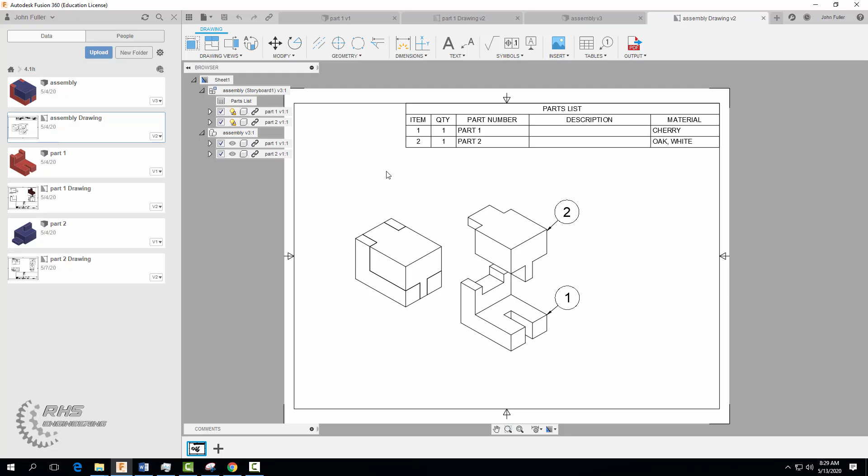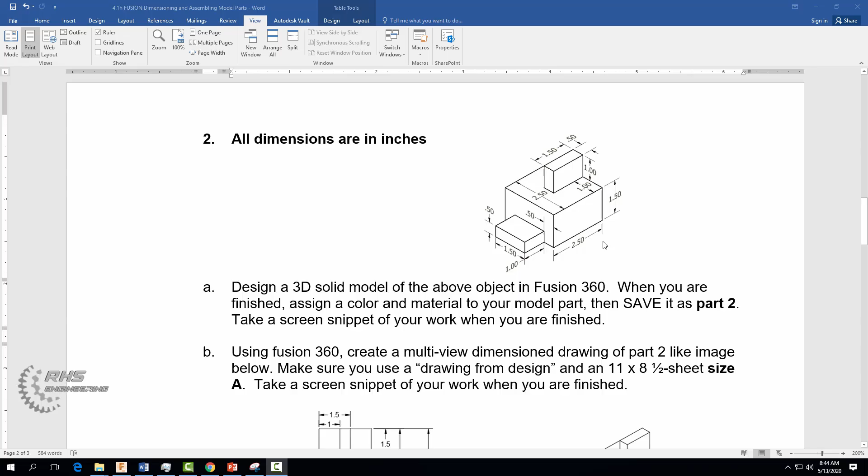So quickly going through our assignment here, we're first going to design this part or object seen here using inches. Then we're going to create a dimension sheet, size A, to dimension the part using a multi-view drawing. Then we're going to design this other part, once again in inches, and dimension it using a sheet size A to create a multi-view drawing of the part.

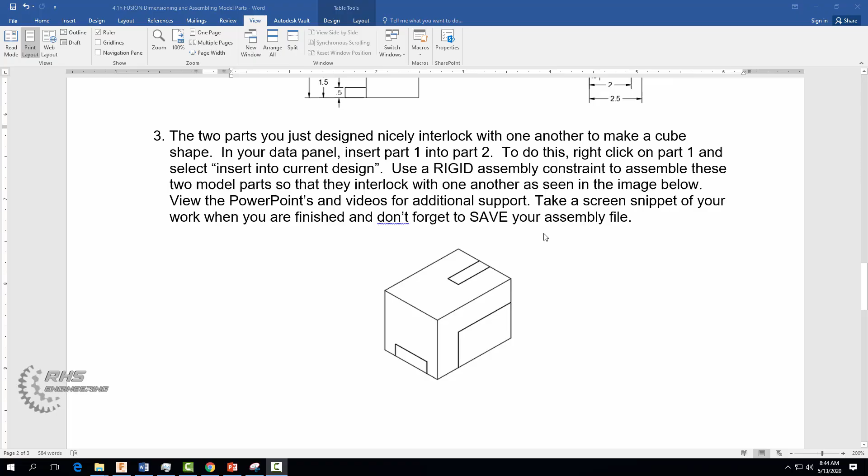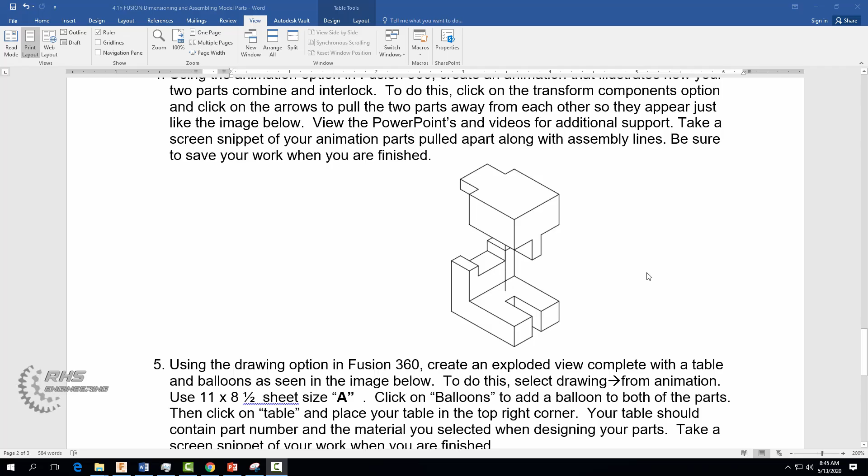Then we're going to assemble these two parts because they kind of interlock and fit together nicely. Then we're going to animate these two parts and pull them apart to show how they come together. Finally, we are going to create an exploded view of these two parts along with a parts list table. So whenever you're ready, go ahead and open up Fusion 360.

So let's come on over to Fusion 360, and the first thing you want to do is start a new project. I'm going to call this Activity 4.1H, hit Enter, and then double click on this project here.

Since I have a tab open, I can go ahead now and start creating my first part. So I'm going to come on over here, create a sketch, and we're going to start on the XY plane. I'm going to go ahead now and close my data panel just to make the part a little bit larger for you guys to see.

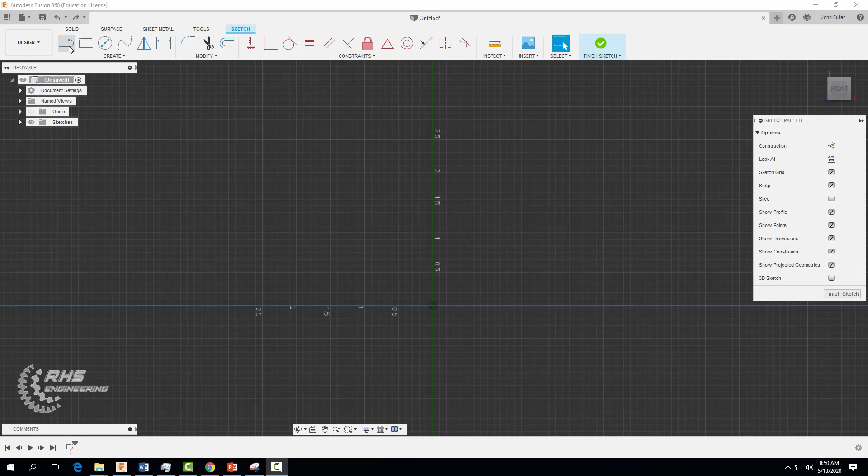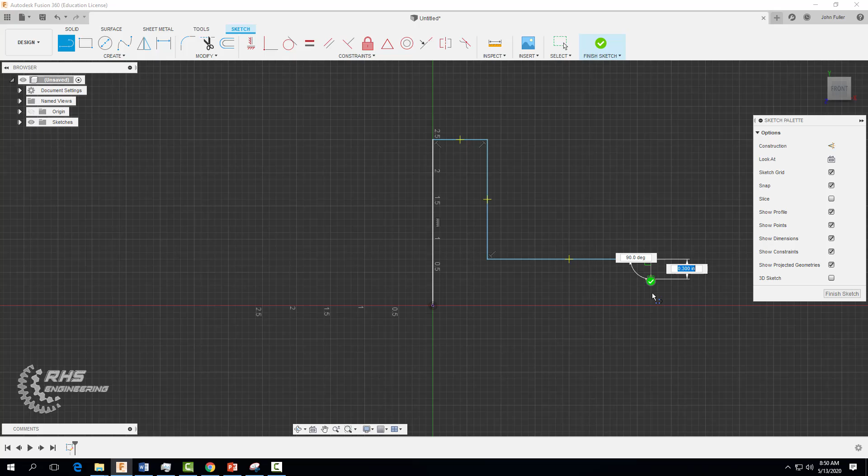Let's go ahead now and start drawing out our first 2D sketch. Come up to your line tool, click on it. Starting at our origin, we're going to come on up a distance of 2.5 inches or so, come across. I'm going to just kind of draw out a rough sketch and we'll dimension it later, so roughly 1 inch or so. I'm going to come down about 1.5 inches, across about 2.5 inches, and then down about 1 and back to our origin.

Now I'm going to go to my dimension tool, make sure that guy's 2.5. Let's make this 1. We're going to make this distance here 1.5, and this distance here 2.5, and this distance here 1. We don't need it because now our sketch is fully constrained. Okay, now we can go ahead and finish our sketch.

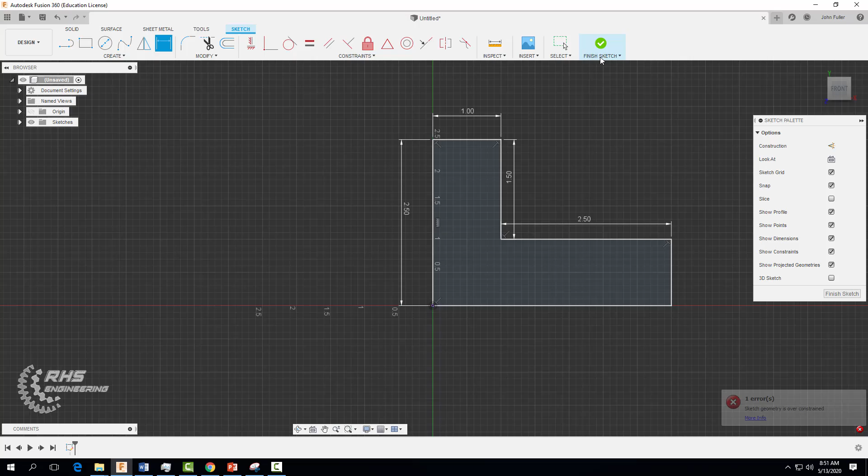Let's go ahead now and extrude it out a distance of, we're going to type in 2.5, and go ahead and hit OK. I'm going to set this view now as my home.

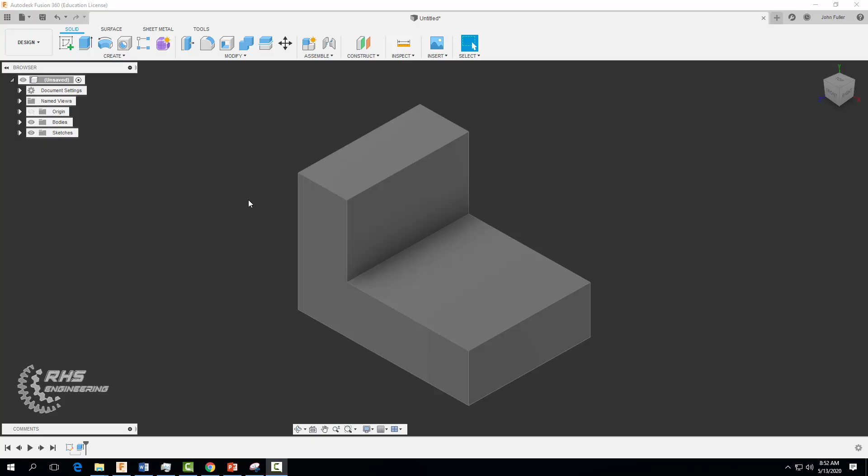Now let's come on up and start a sketch here on this face. Go ahead and click on it. I'm going to grab my 2-point rectangle. I'm going to start on this line here, right around in this area, and I'm just going to draw out a rectangle, something like that. And now we're going to dimension it to the appropriate dimensions.

So let's come on over here and click on your sketch dimension tool. From each side, we want that to be a distance of 1. Same thing on this side. And then we want this distance to be 1.5. Enter. Okay, now let's go ahead and finish our sketch.

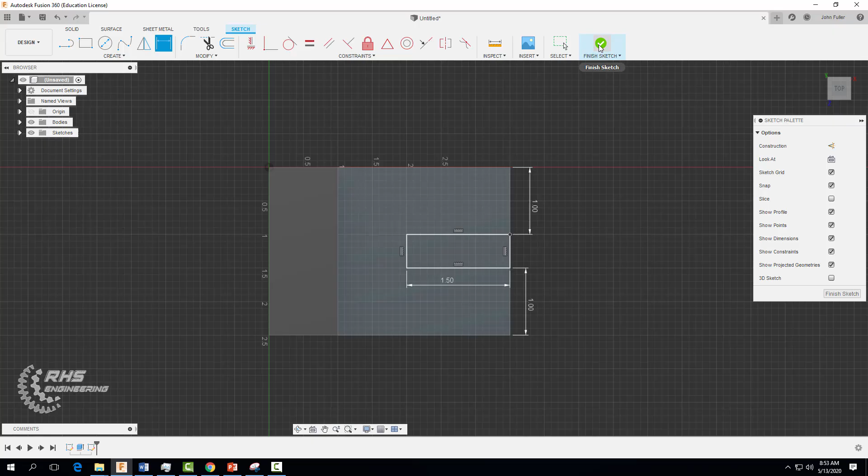We're going to extrude it. We're not going to add, we're going to go the other way, a minus 1. Make sure it says cut, hit OK.

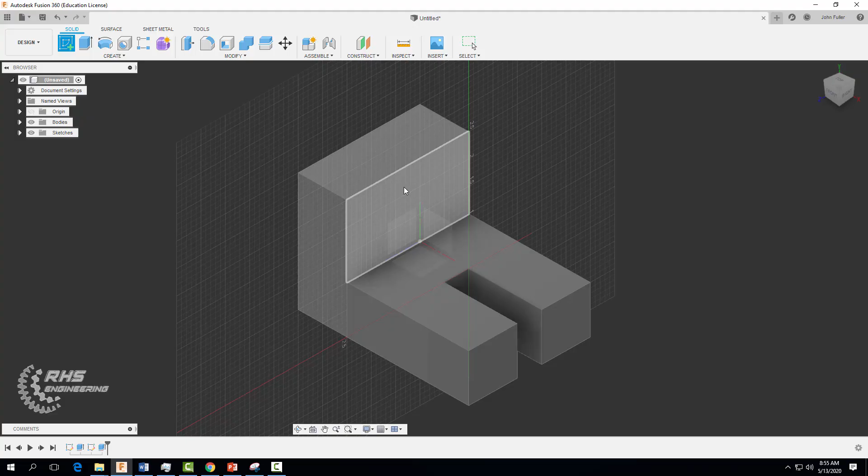Now let's create this last feature here on this face. So let's start a sketch here on this face. And once again, we're going to grab out our 2-point rectangle, find the top line here, and right in this area, I'm going to click and draw out a rectangle and click again. And I'm going to grab my sketch dimension tool.

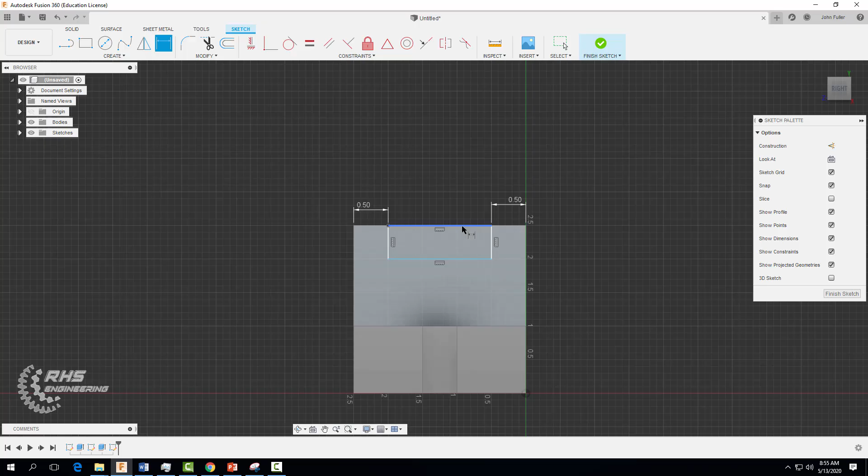And from this side, we want it to be 0.5. Same thing on this side, 0.5. And then this distance also 0.5. All right, and we're done. Let's finish our sketch. We're going to extrude that guy the other way, a distance of -1. Hit OK.

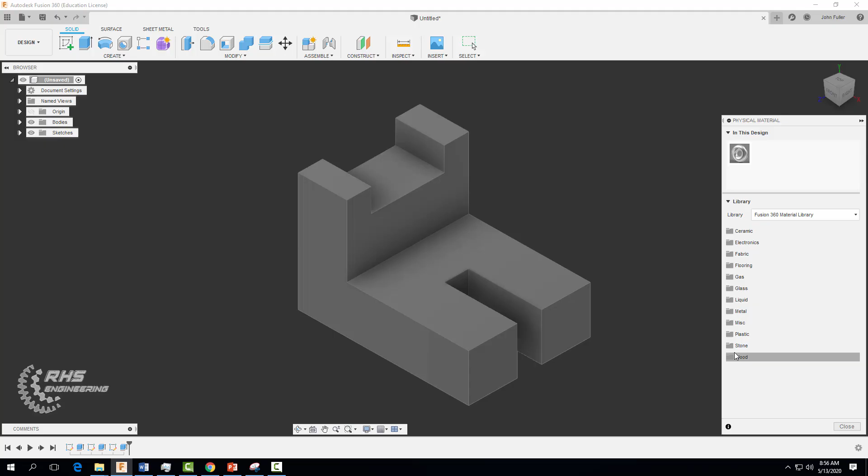Now let's go ahead and assign a material for this object or part. We're going to come on over to Modify and go to Physical Material. And I'll let you decide on a material you would like to use. I'm just going to go ahead and pick some wood here. Let's just use cherry.

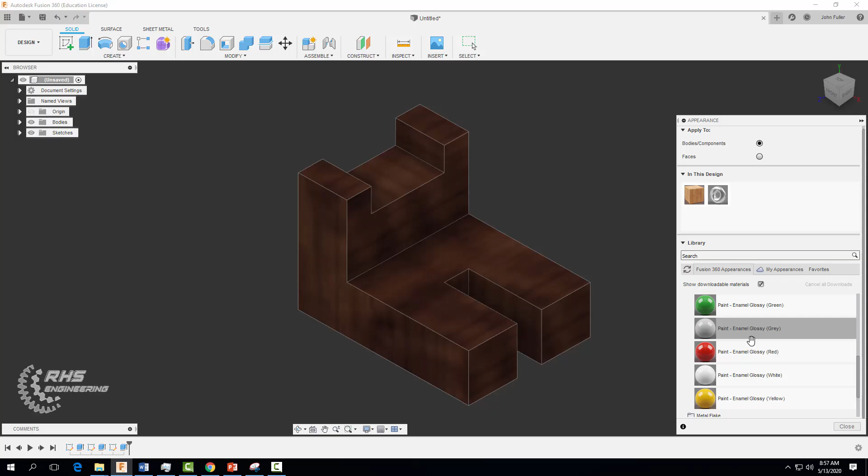Now let's say you want this to be wood, but you also want to add a color to this. To do this, you come on up to Modify again and do Appearance. What you need to do now is come on over here to Paint. Click on Paint, and you can do something glossy, metallic-y, whatever you want. I'm just going to do a glossy sort of red for this part. So it's got a material and we painted it red, essentially. All right, go ahead and close.

And when you're done, just go ahead now and we're going to save this as part 1 in our activity 4.1H location and hit save.

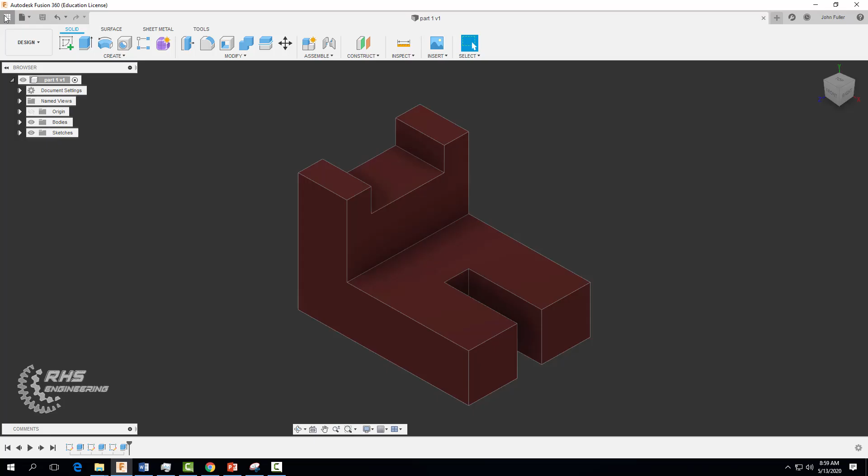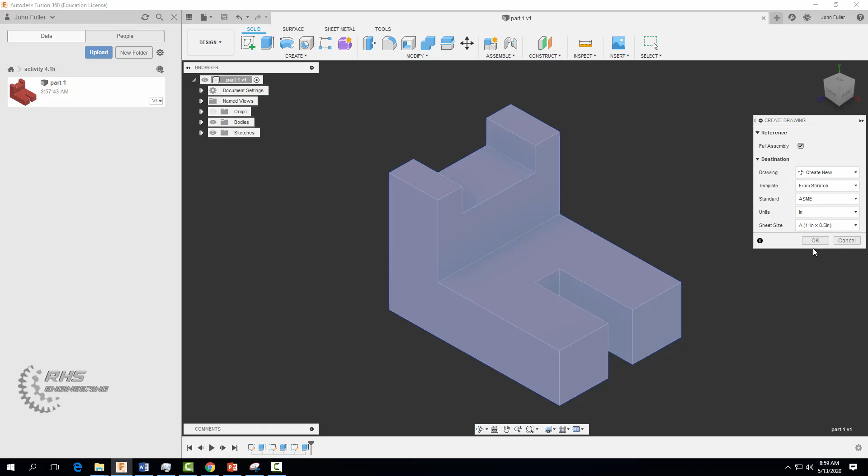All right, so now let's go ahead and make a dimensioned drawing file of our object or part seen here. So to do that, let's just go ahead and show our data panel here. And under design here, because we're in design mode, we're going to now do what's called a drawing, a drawing from design and from this design. So go ahead and click on that. And we want a sheet size, we want to select 11 inches by 8.5 inches, and then hit OK.

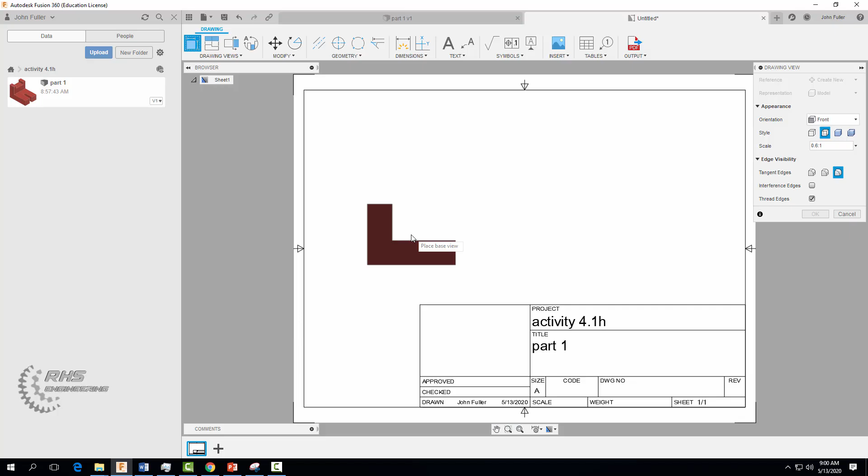And now it's asking you, right when it opens up, hey, this is our front view, where do you want it? And this is our scale, 1/2 essentially. Well, I'm going to change this to make it a little bit bigger. I'm going to make it 0.6 to 1, so it's a little bit bigger. Notice how it's got a little bit bigger now, because I want to use up all of my space.

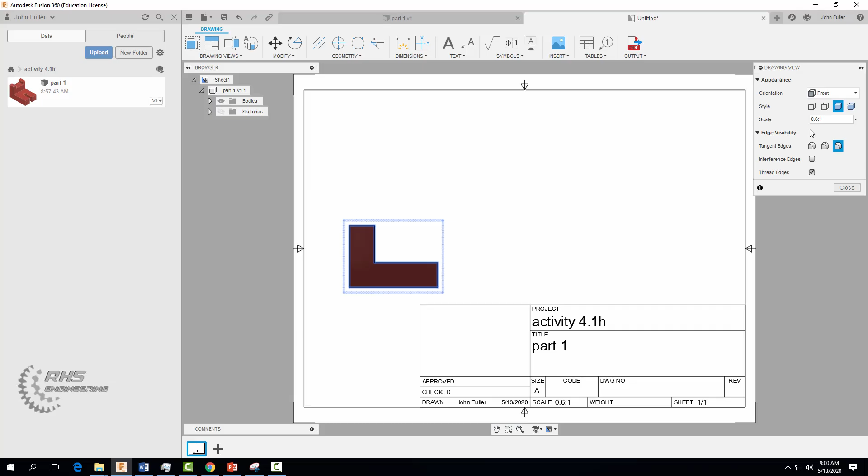So I'm going to click here, and also a couple options: if you want to leave it color like you see here, click right here, click shaded. Let's just go ahead and do that. Let's hit OK. But let's say you don't want to make it shaded, so we're going to edit this view and click on it again, and we can just do a basic outline of it. Let's keep our scale the same and go ahead now and hit close.

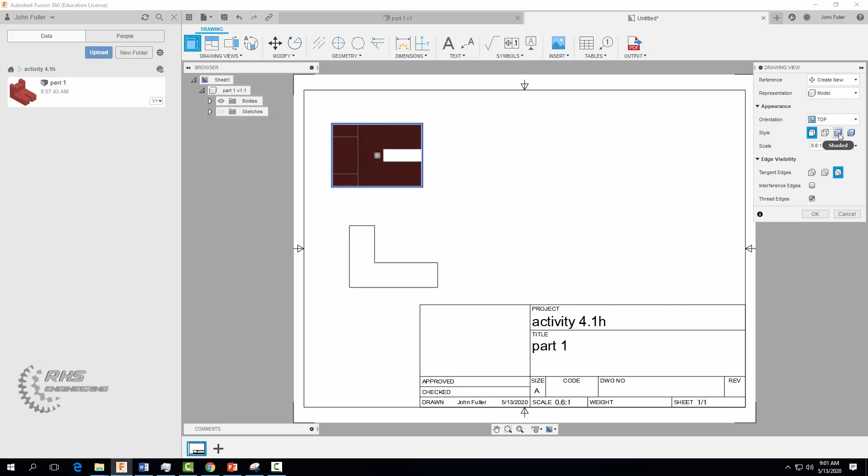Now let's bring in our top view. So right up here under base view, I'm going to click here and change this to top view. I'm going to change my scale again to 0.6 to 1, so it's a little bit bigger than 0.5 to 1 or half. And I'm going to change this to visible edges. Like I said, you can make it color if you want and just click on that shaded button right there. Go ahead now and hit OK.

I'm going to bring in my side view now. I'm going to come over here. My right side view would be right here. I'm going to change the scale again, 0.6 to 1, and let's make those visible edges outlines. I'm just going to click right over here and then hit OK.

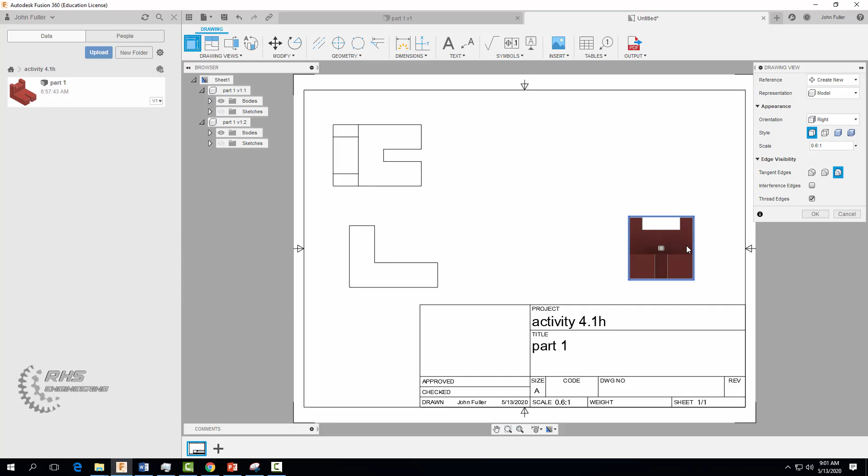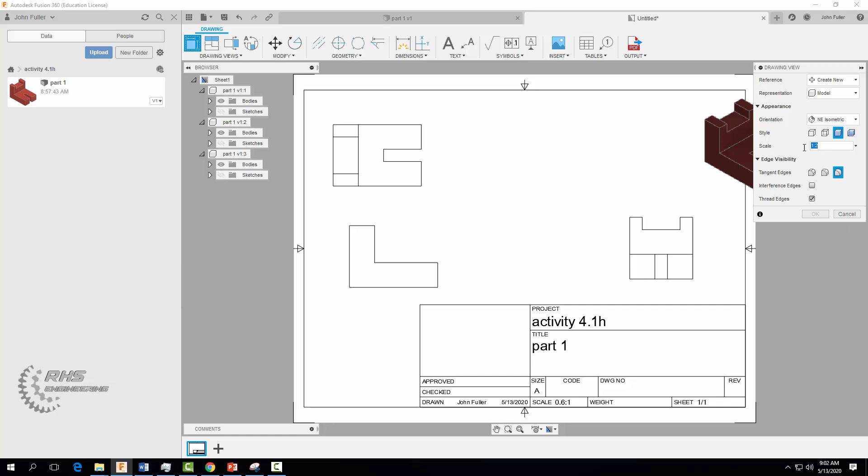And then finally, let's bring in our 3D view. Remember, every multi-view drawing should have a front, top, and side view and a 3D view. So let's do a base view, and in this case, we're just going to come on down here and check out, let's use the northeast isometric. That looks good. And I'm actually going to leave this one color, okay, shaded. Let's keep this consistent with the size, 0.6 to 1. And I'm going to click where I want it and then hit OK.

And actually, you know what, let's move it down. So you come on over here, if you want to move it, you click move. And then you click right here and you just kind of move it, and then hit OK.

Remember, these drawing files are extremely important. This is what the company will send off to the manufacturer so they have the necessary information in order to make the part. Okay, so let's go ahead now and start adding dimensions.

Come on up here, click on the dimension button, and on my front view, I'm just going to click on this side, click on this side, and drag my mouse up and click again. I'm going to add one more, click here, click down here, drag my mouse up and over, and then click where I want it.

And now on this view over here, I'm actually going to move it. So I'm going to go to move, and I'm going to kind of just move it a little bit up and out of the way.

That's probably good. Okay, now I'm going to go ahead and start adding dimensions again. Let's get this distance to this distance, this distance to this distance, this distance to this distance.

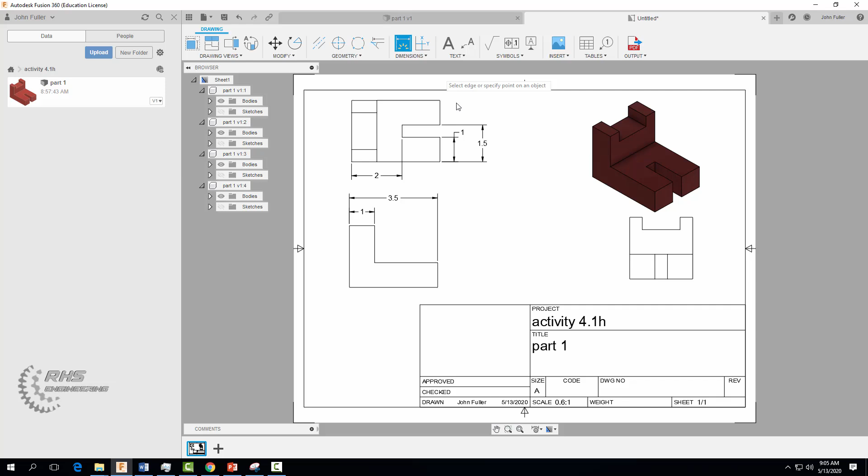All right, now let's come on over to our side view and start dimensioning it. I'm going to hit escape to get out of dimension mode, right click, move, select on it, and move it down right around in here. I think that'll do the trick. Hit OK, come back to dimension.

I'm going to click here and here, and now let's do here to here, the overall height here. And then we're going to do this little distance right here, and then this distance. We'll move some stuff around here in a second to make it look better.

Okay, so I have everything dimensioned now. I'm going to hit escape to take it out of dimension mode, and now I'm going to click on these guys to move them down to make room. I'm basically just going through and tidying up stuff. I don't like this one up here, so I'm going to bring that one down in here. I'm going to move this 1.5 in a little bit. And with that said, I'm going to move this guy a little bit out of the way.

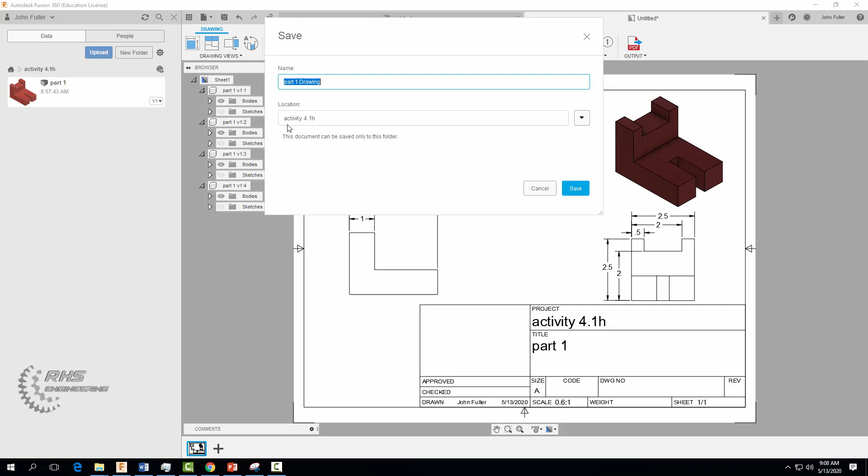And when you're done with your dimension drawing file, we need to save it. Let's go ahead and select save. Part one drawing looks good, it's in our activity 4.1H. Hit save, and it should show up over here. And that's it for part one.

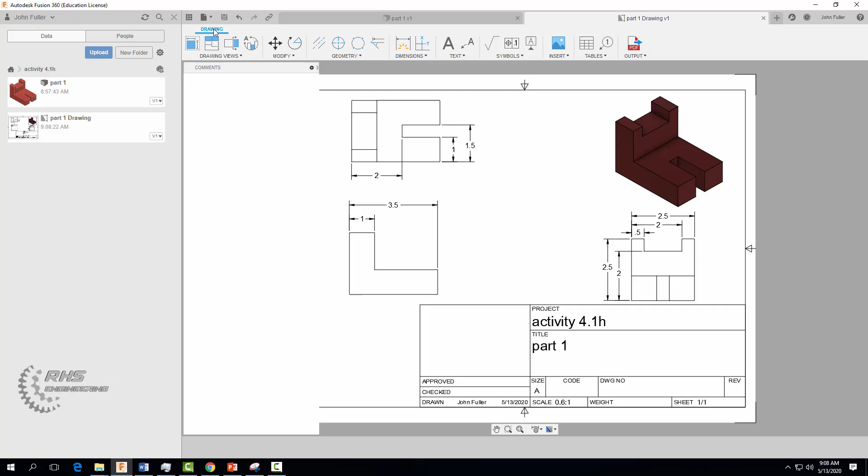Now let's go ahead and start part two. To do that, come on up here. You can also just start a new design. I'm going to click here, new design. For our second part, let's go ahead and create a sketch on our XY plane. I'm going to X out of my data panel.

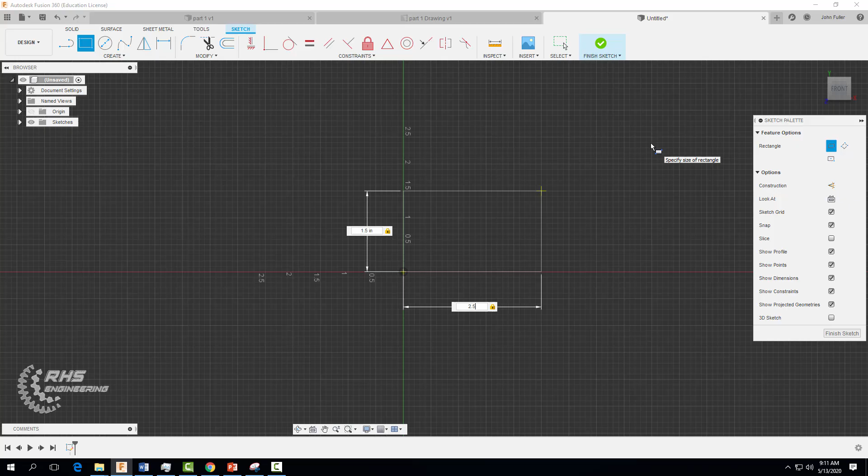I'm going to grab my 2-point rectangle tool and draw out a square. I'm going to type in, while that's highlighted blue, 1.5, tab, 2.5, and then hit enter. Okay, that's it for the sketch. We're going to finish the sketch, and extrude it out a distance of 2.5.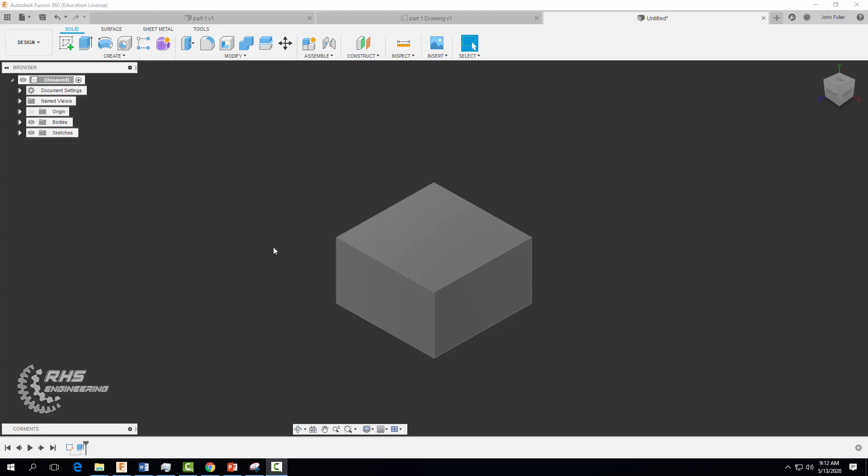I'm going to set my current view as home. Now let's create a sketch on this front face right here, and grab our rectangle tool to draw out a rectangle about yay big here. I'm going to type in 0.5, tab 1.5, hit enter. Then I'm going to dimension it from this edge a distance of 0.5. Let's finish our sketch.

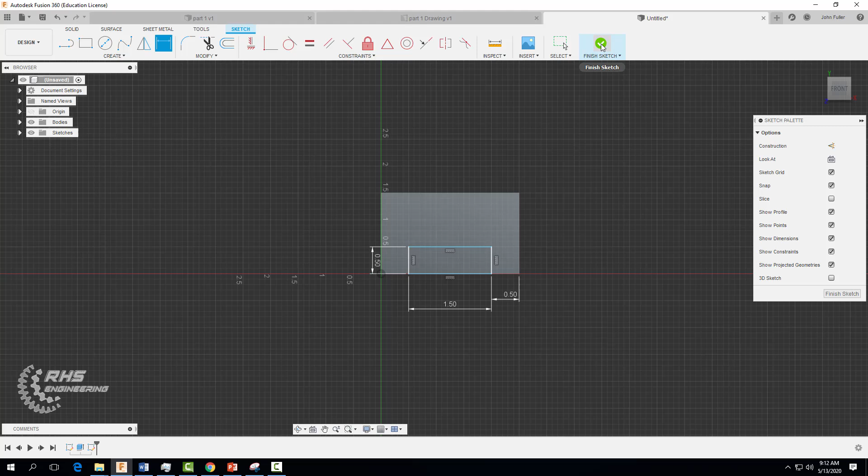We're going to extrude it out a distance of 1 inch. Click on the part or the face you want to extrude. Just make that 1. Hit OK.

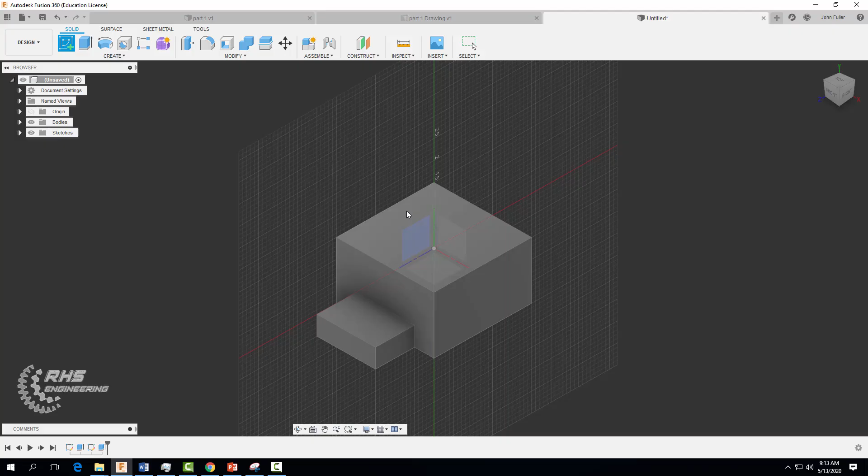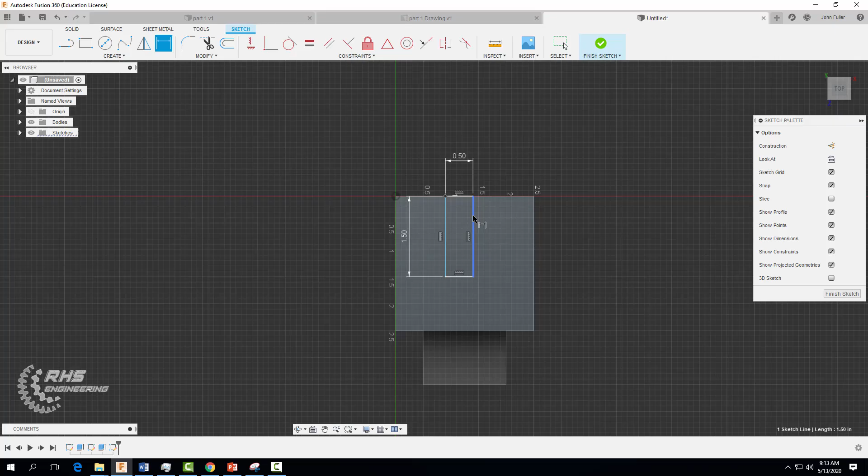Okay, and now we got to make this top feature, so we're going to start a sketch right up here on the top. I'm going to grab my 2-point rectangle tool and drag out a rectangle. I'm going to type in 1.5, tab, 0.5, enter. And now I'm going to dimension it from this side a distance of 1. That's it for the sketch.

Let's go ahead and finish it, and we're going to extrude it upwards a distance of 1 inch.

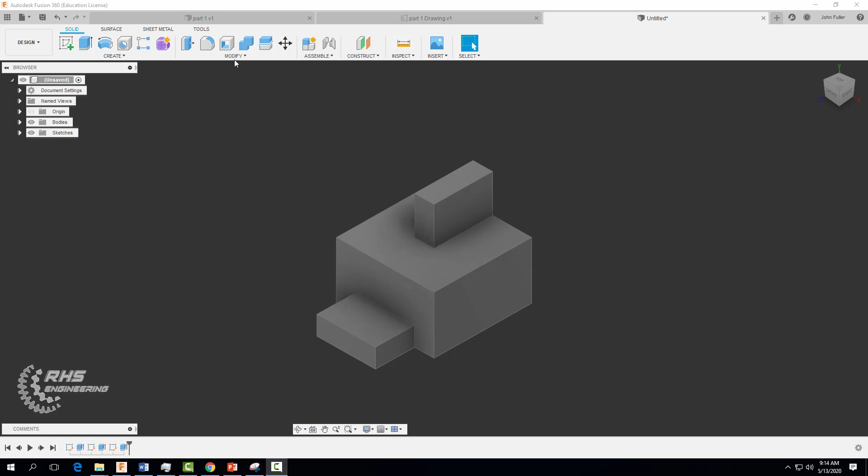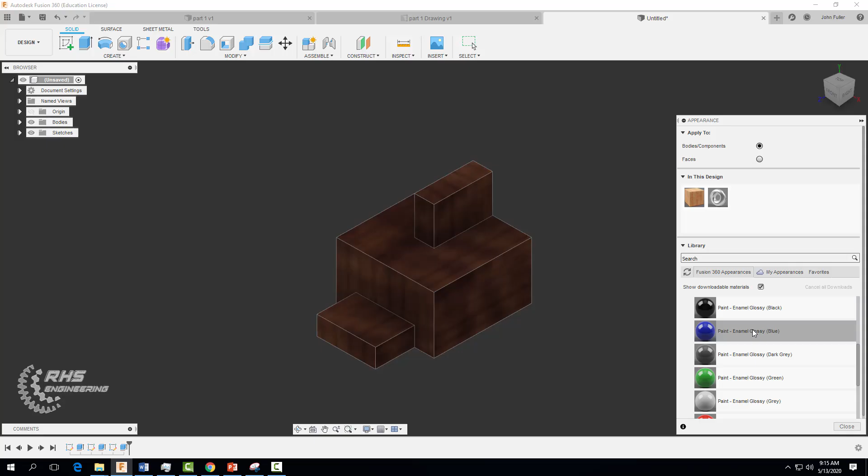So now let's go ahead and give our part, now that we're done, a physical material. I'm going to be consistent, you guys can choose whatever material you want. I'm going to use cherry wood here. I'm going to hit close, and also give it a color, a different color from the other one, and paint it again. But I'm not going to paint it red, I'm going to paint this one blue, so they're different. Go ahead and hit close.

Now that I'm done, you always want to save, so go ahead and save it. We'll call this part 2, and save.

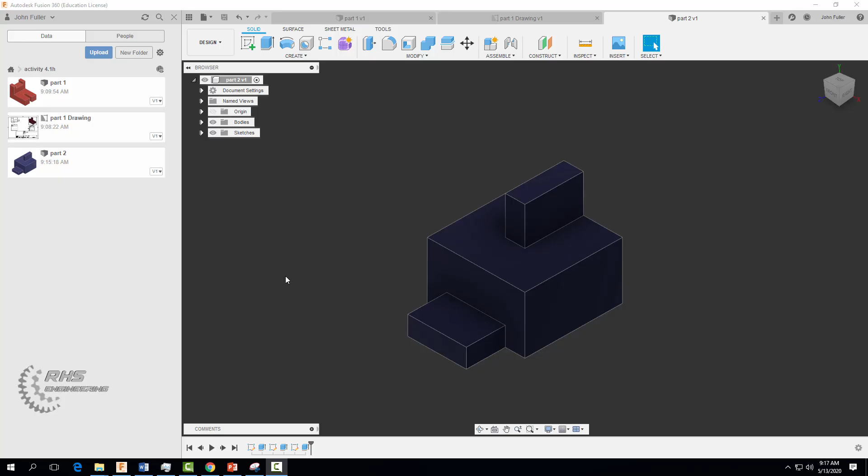Now that we're done with our part, let's go ahead and create a drawing file for it from design. And let's be consistent - for this class, we're always going to choose sheet size A, 11 inches by 8.5. Go ahead and hit OK.

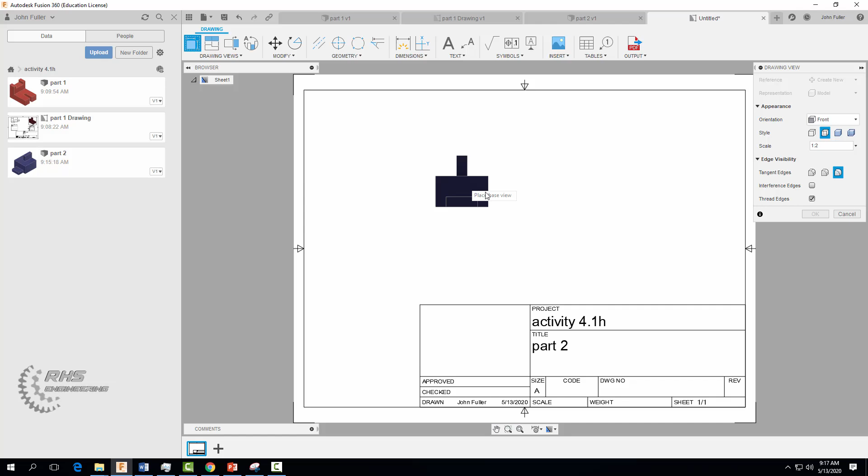Okay, it's going to automatically bring in a view. I'm going to select this as my right side view. Because our front view really should - I'm going to just stick with a half 1:2 scale here for now. I'm going to select visible edges and hit OK. Remember, your front view should be the view that always has the most features and the longest dimensions, and I don't think this one applies.

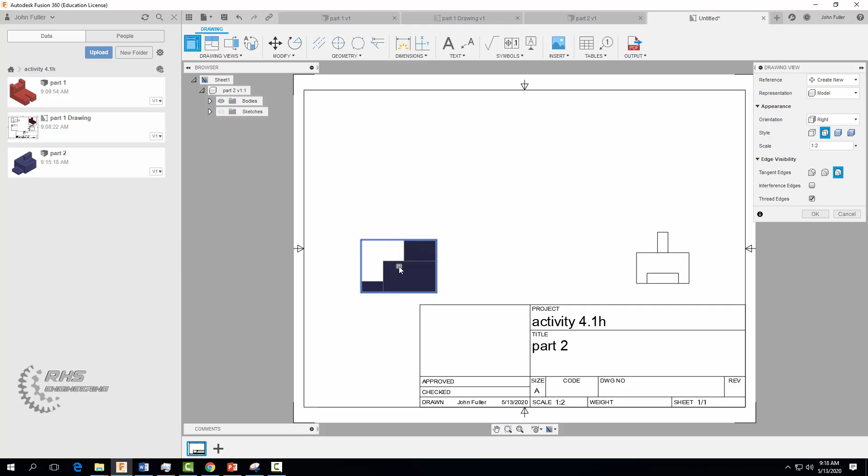So I'm going to come on over here now. Let's change the right side view, and I'm going to use this now as my front view, and I'm just going to kind of click right here, hit visible edges, OK, and my top view.

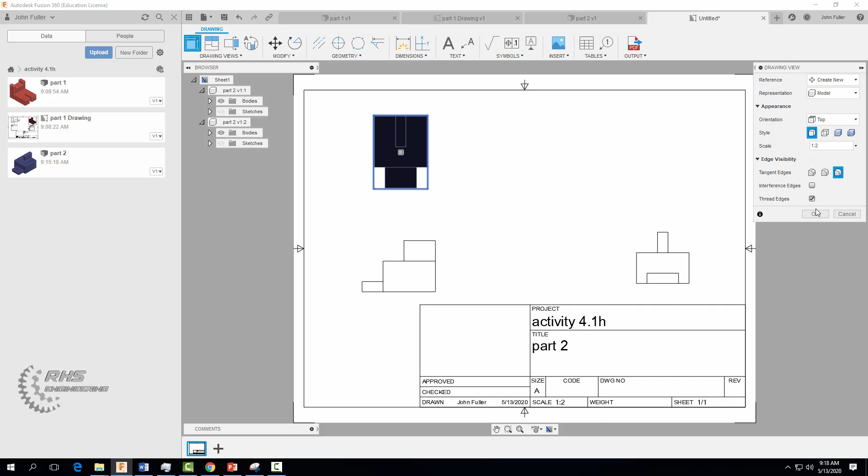And let's give those visible edges, OK. And then finally our northeast isometric view. You can give it some color if you want, or make it with just visible edges - up to you. I'm going to click right here, hit OK.

Now we just need to go ahead and start adding dimensions to it. Let's come on up to our dimension button here, and we're going to click here and click here, click here and click here, and then click here and click here.

All right, now let's do our top view. I'm going to click here and click here, click here, and then click here. And then we're going to click here and click here.

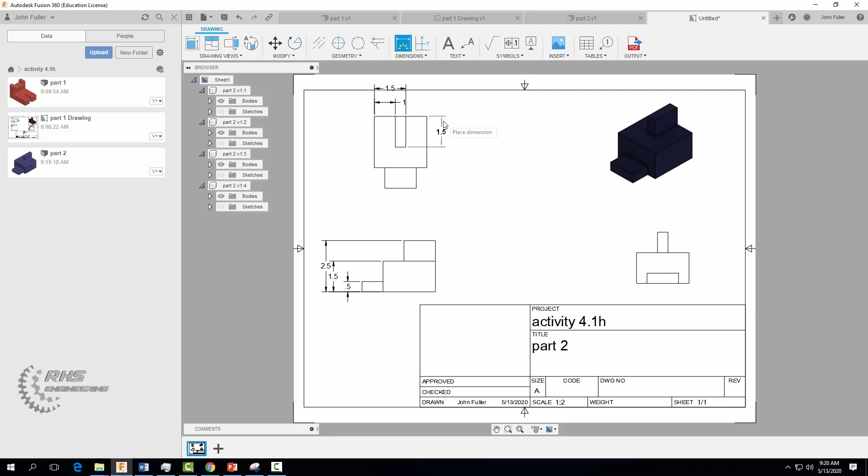All right, and we'll go back through later and sort of clean things up. And then we're going to click here and click here for this dimension.

Okay, I'm good now, I've done all my dimensions. I want to hit escape to get me out of dimension mode. And now I'm going to kind of move some things around, try to move these a little closer. I'm just going to move this guy up a little bit. So move.

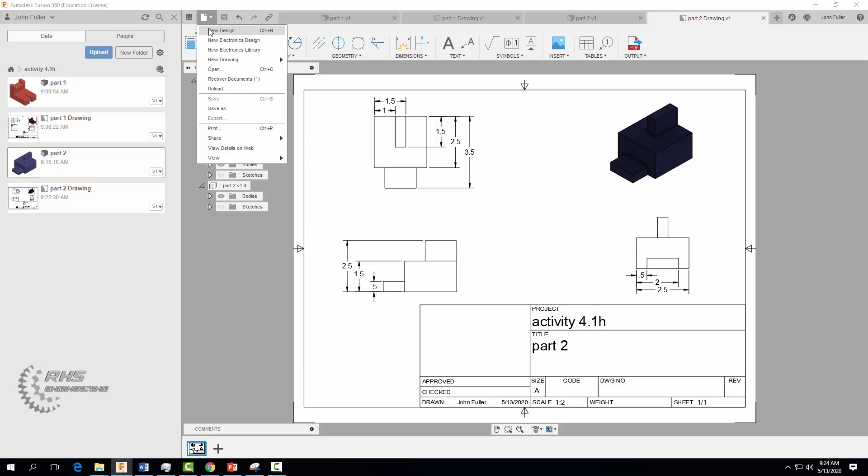Now that I am done with the drawing file here, now let's come back up and we're going to do a new design. Where it says design, OK, we're now going to start assembling our two parts. But first we need to do something that's very important - we need to save this and we're going to call it assembly, and hit save.

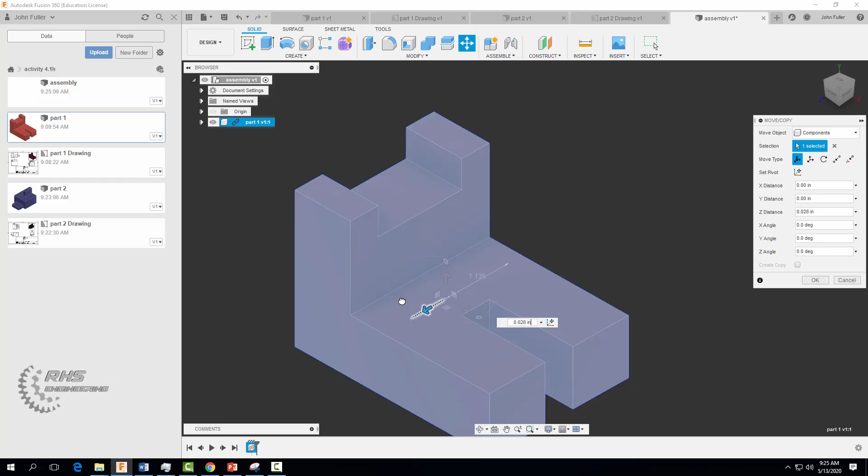And now we're going to select our two parts here, part 1 and 2, and we are going to place them into our new design here. So we're going to right click here, insert into current design. I'm just going to kind of move it down here a little bit, hit OK. I'm going to do the same thing here for part 2, right click, insert into current design, just going to move it out of the way a little bit, hit OK.

The first thing we want to do now is ground one of our parts. So I'm going to choose this part, right click on part 1, and we are going to ground it. Okay, this will not allow it to move. Now I'm going to right click on part 2 and I'm going to select move.

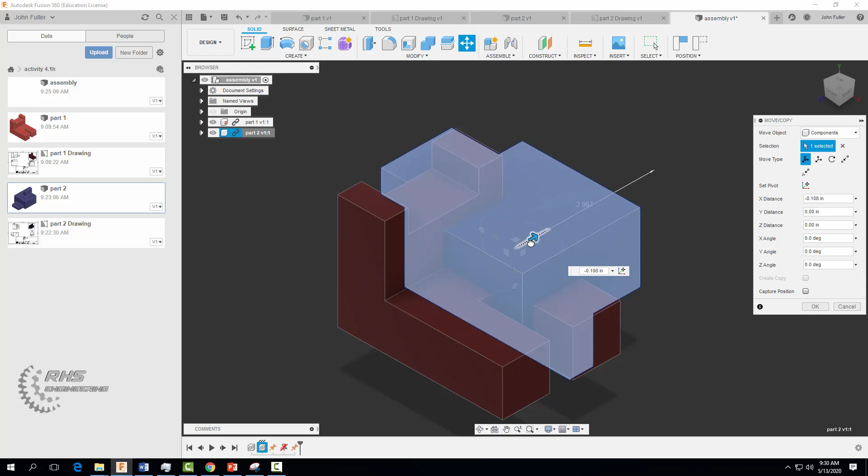Now here's some things I want you to understand: when we go to move it, these little arrows pop up. It's always a good idea to move it in a manner so that you can kind of see how it orientates itself. So if you look right here, OK, it kind of goes in just like that. So it's always a good idea, when you bring it apart, to move it in a manner so that you can see how they fit together, OK.

So I'm going to just do that, leave it where it is right there, and I'm going to hit OK. So this part right here sort of goes in here, and this part down here, this little notch sticking out, fits in here.

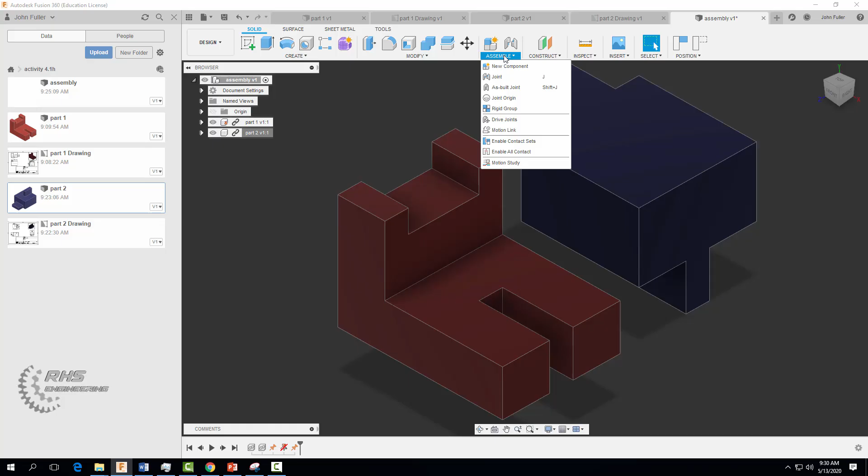So let's go ahead now and assemble the two. What you want to do is come on up here to Assemble, and we are going to select Joint. If this shows up, just go ahead and hit Capture Position.

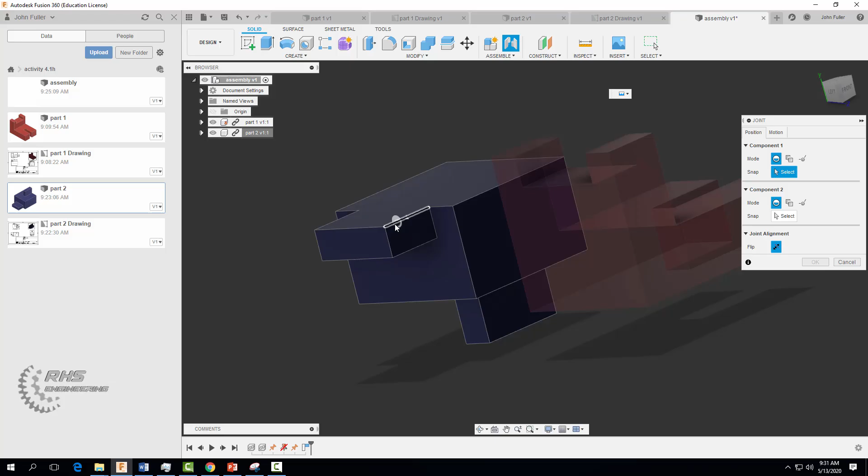Now when you scroll over your face, you'll see these different points pop up on the corners, the midpoints. Here's a middle point, another middle point. You got to choose the points and match them up here with the points on the second part when you're doing an assembly. I know this point right here will correspond and match up with this part right here. And there it is, our assembly is done.

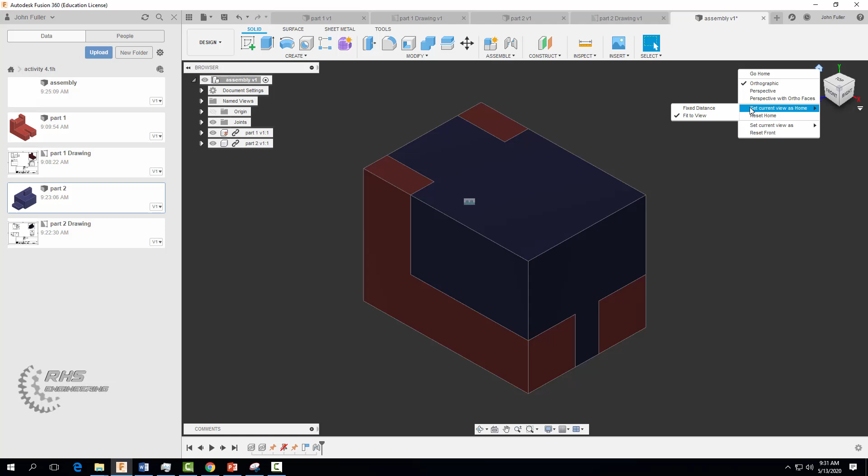Go ahead now and hit OK, and we're good to go. I'm going to choose this view right here now as Set Current View as Home. And now let's save it. And we are done with our assembly.

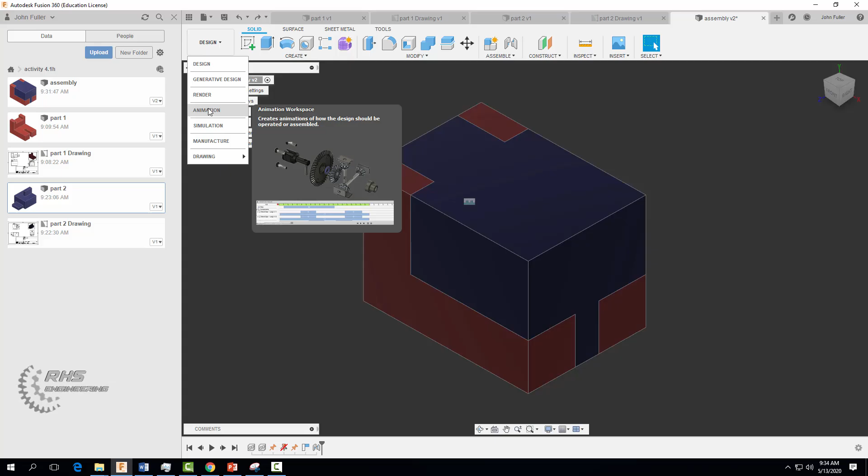Once your assembly is done, you can now create an animation to show how the two parts come together. So let's come on over here to Animation. I'm going to zoom out here, and with my mouse wheel I'm going to come on up here and select Transform Components, then click on the part I want to move.

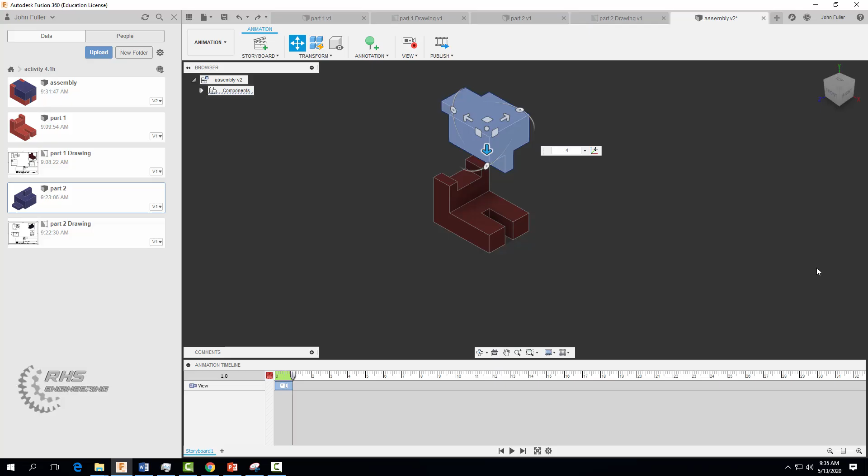I'm going to use these arrows to move it up a distance of -4 inches, and hit OK. Let's do the same thing for this part: click on Transform Components, click on this part, move it down a distance of -4, and hit OK.

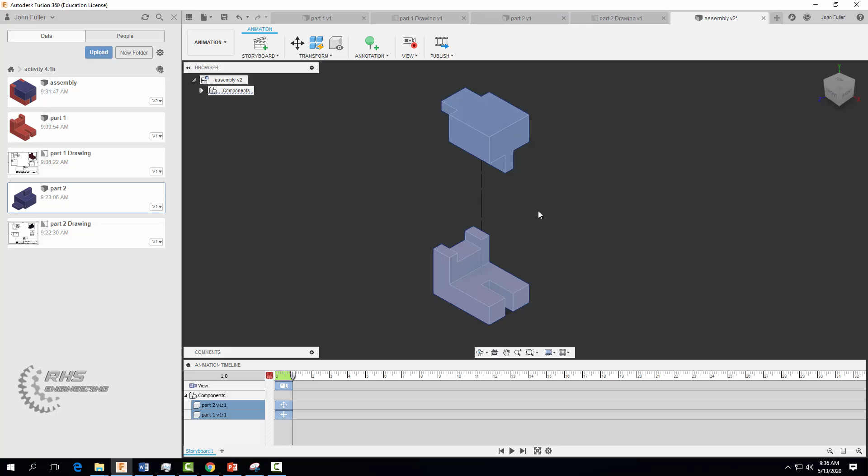Now I'm going to click on the part, hold down Control and click on the second part, then right click and choose Show/Hide Trail Lines, which will show a line in terms of how they come together. Now let's go ahead and hit play and watch our animation. You can basically see how our parts follow these lines as they come apart.

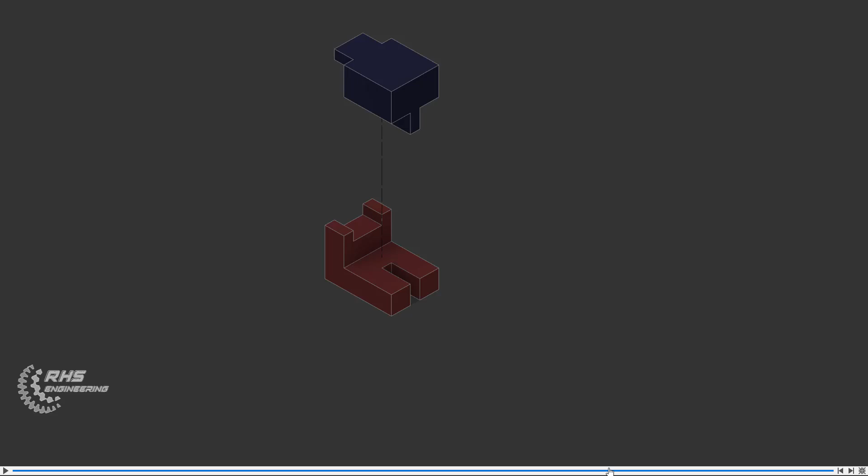All right, fool around with it. You can also do some other options — we can go backwards, and you can make your videos longer.

When you're finished, just be sure to save your animation. And something very important — it's extremely important to realize that all of these files are linked. So when you go and change part 1, it's going to affect this file. Be cautious when you go back and change things, because you have to remember that all of these files are linked together.

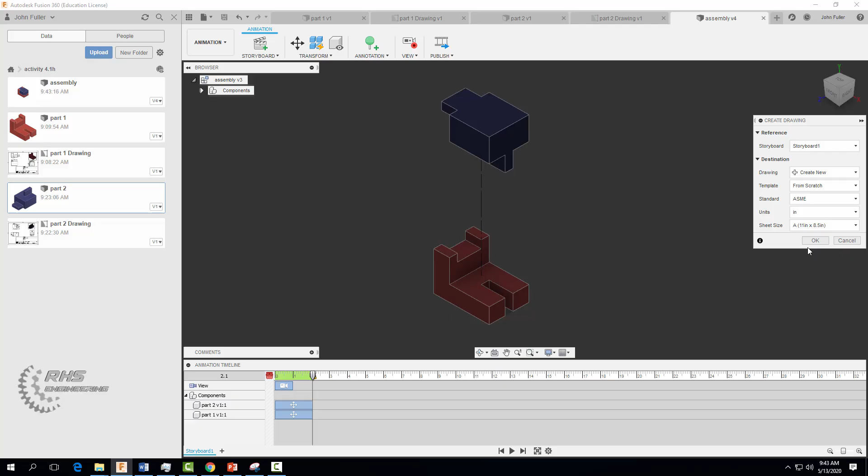All right, so the last thing we want to do now is create an exploded view. We're going to come on up here where it says Animation and do a drawing from animation. And like we did last time, we're going to use an 11 inch by 8.5 inch sheet size A.

This automatically pops up, and I'm going to just sort of put this right here. I'm going to keep my scale at 1/2 — you can change it if you want to make it smaller or bigger. I'm going to select visible edges and hit OK.

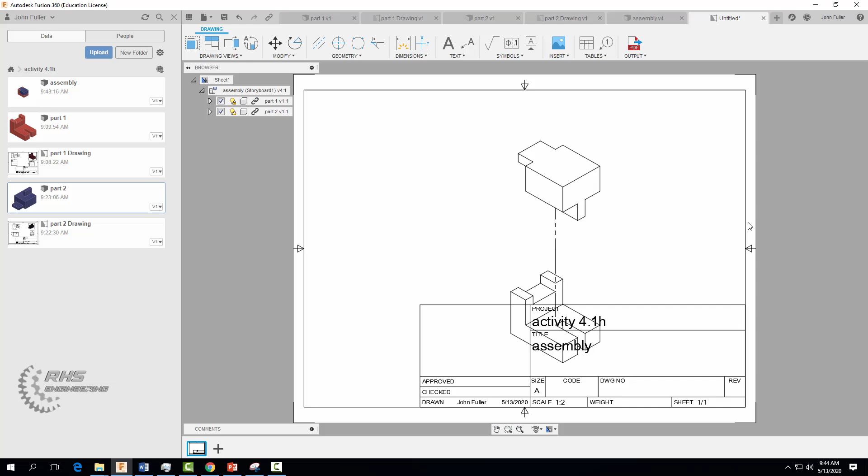Let's delete the title block here for this exploded view. Now I'm going to bring in my actual assembly too, so I'm going to click over here on Base View. I don't like this view, so I'm going to change it to Northeast Isometric.

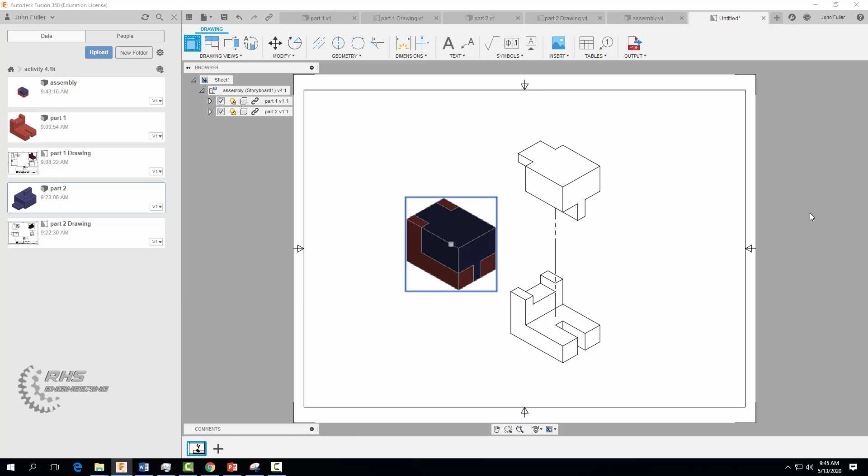I'm going to click there and use my visible edges here — if you want to make these color, that's entirely up to you. I'm going to click here, hit OK. All right, looking pretty good.

So the last thing we want to do now is create a table parts list. We're going to come on up here where it says Tables, and we're just going to select, well, Table, and select that guy right there. Then I'm going to just drag it up into that top right corner.

You'll notice our cherry wood material shows up, our part numbers or names that we saved them as — part 1 and 2 — show up, and we got some balloons that automatically showed up. So we're looking good. Be sure to save it when you're done.